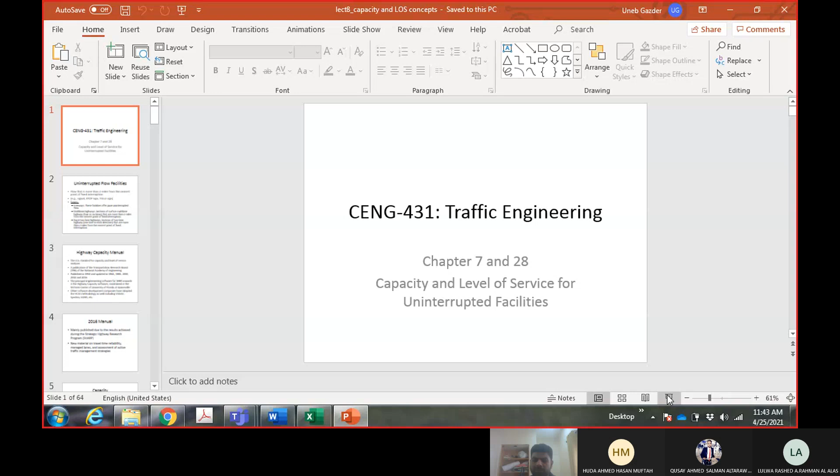So this is a very important and a very large topic of this course. Okay, and so this lecture covers this topic from two chapters of the book, chapter 7 and chapter 28. So some of the initial slides are from chapter 7, and then when we go to the analysis, it will be from chapter 28.

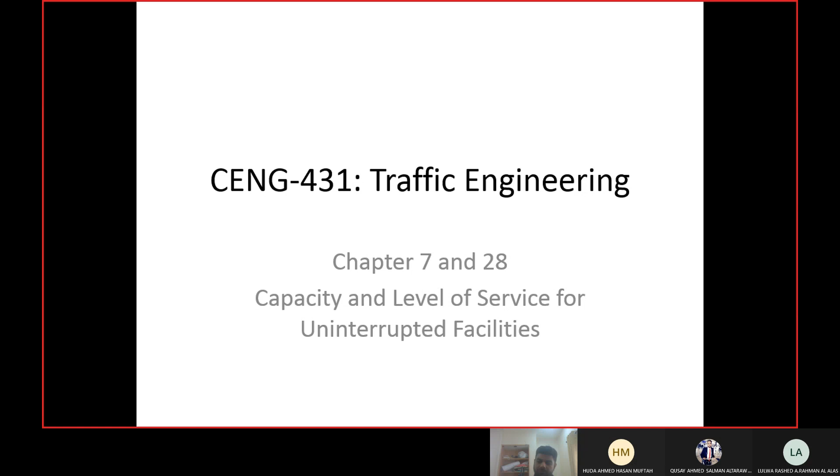The next lecture, the next slides will also be related to the same topic. Okay, it will be for a different type of highway, but it will be again related to capacity and level of service. So in this course, we will discuss the capacity and level of service for uninterrupted flow facilities. So we already know uninterrupted flow facilities are facilities which do not have any interruptions.

Now, can someone tell me what are the interruptions? What do you mean by interruptions? Huh? What do we mean by interruptions? Which interruptions make the facility interrupted or uninterrupted? Come on, go ahead. What are the interruptions? It's written there in the slide as well, in front of you. What do we mean by interruptions? No one?

Interruptions are intersections. So you can see the examples given here: signal, stop sign, yield signs. Okay. So if a facility does not have any interruption at all, we call it a freeway. So a freeway is a special type of uninterrupted flow facility which does not have any interruptions, does not have any intersections. Then there are some facilities which have interruptions, but these interruptions are very far from each other. Like they have given a value here, more than 2 miles from each other.

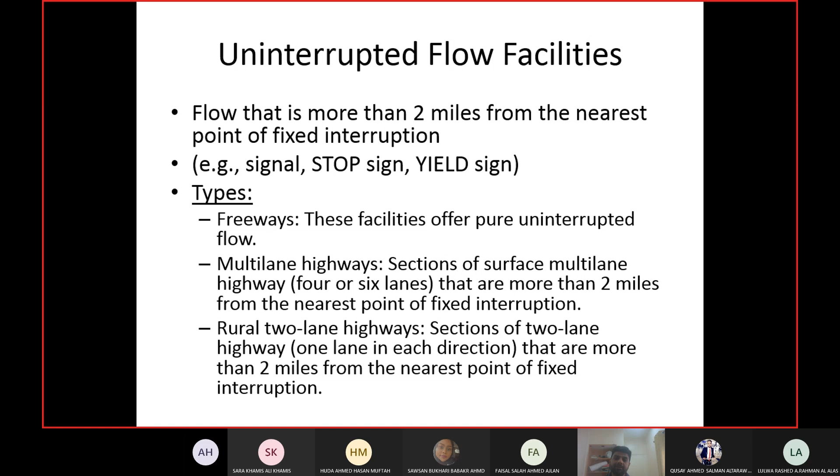So these highways which have interruptions more than 2 miles from each other can be multi-lane highways or two-lane highways. So as you can see the difference here, multi-lane highway means it has multiple lanes, and two-lane highway means it has only 2 lanes. Okay, so multi-lane highways can be 4 lanes, 6 lanes, and so on.

The procedure which we are going to follow in this topic is given by the Highway Capacity Manual. So what is the Highway Capacity Manual? It's a standard developed in the USA, and it is adopted in many parts of the world. Okay, so it's not exclusive for them. So it's a US standard by which you can calculate capacity and level of service of highways. The Highway Capacity Manual tells you the procedure and the methodology to calculate the capacity and level of service of the highways. Capacity, we know, right?

What is capacity? Yes, what do we mean by capacity? Anyone? What do we mean by capacity? If I say capacity of the highway is this much, what does it mean? Come on.

This section is always more responsive than section 1. I don't know. You are having the hangover of Sunday. Capacity, very easy question. Okay, if you don't know, don't know. What can I do? I cannot tell you again and again.

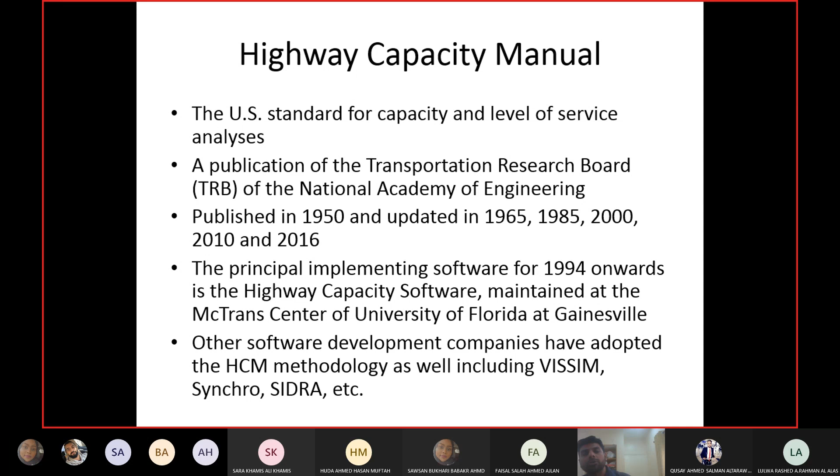Okay, if any one of you has attended the previous guest lecture which we had last week, Mr. Samim mentioned that for most of these softwares, the student versions are available. Okay, so you can download the student version. I will share the tutorials with you later on for Vissim, because you are required to use it for your project.

The 2016 manual was published as a result of a research program. That research program is known as the Strategic Highway Research Program, SHARP. Okay, in short, SHARP, Strategic Highway Research Program. So they started this program maybe 2010 or something, and they wanted to do some more research so they can update the 2010 manual.

So they did not have in mind that they would have to publish a new manual, but they did so much research that in the end they got excited and they said, no, we will publish a new manual altogether. Instead of just changing a few sections, we have so much data, let's publish a new manual. So they published a new manual. So in the 2016 manual, they have updated the analysis of the previous manual, and they have included some new things as well. For example, travel time reliability, that was not part of the old manual.

Managing of managed lanes. What are managed lanes? Managed lanes are lanes which are exclusive for specific road users. For example, high occupancy lanes, bus lanes, bicycle lanes, they are known as managed lanes. And assessment of active traffic management strategies.

So active means you are managing traffic on the basis of real-time data or on the basis of future data. So what is going to happen in the future, I will predict it, and I will make a strategy from now on. Okay, or you do it on a real-time basis. Okay, that is also active traffic management. So you have congestion on a particular highway, you do something so that demand for that highway will be reduced and congestion will be eradicated. So these are the new things which are included in the 2016 manual.

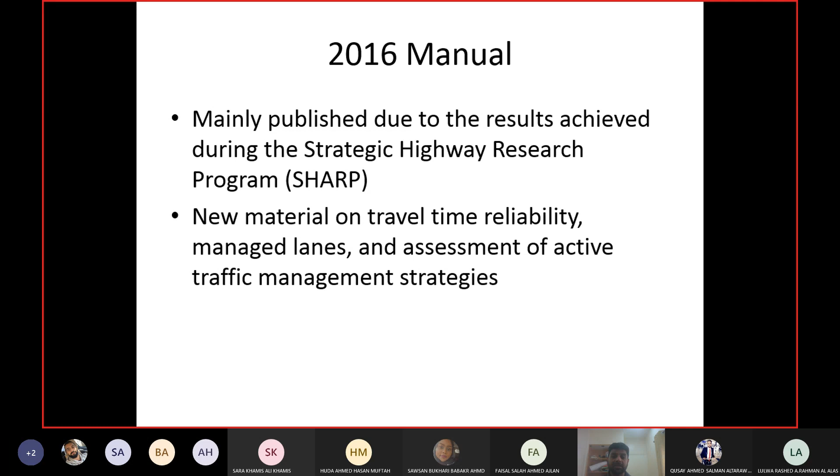Okay, according to the manual, capacity of a highway is defined as this. Okay, what I was asking earlier was basically this thing, which we already know: maximum flow rate for a facility. You already know that much, or you should know that much. Capacity is the maximum flow rate you can have on a facility. But in the manual, they have tried to elaborate it a bit more. So for example, now they are saying it can be maximum flow rate of vehicles or persons. In the previous chapters, we have only discussed the capacity in terms of number of vehicles, but it can be number of persons as well.

For example, the design for the metro in Bahrain has mentioned the capacity of metro service as 6,000 persons per hour per direction. 6,000 persons per hour per direction. What does it mean? We know what it means. Why is the capacity given in terms of number of persons? Because it's a public transportation system. Okay, for a public transportation system, you are not accommodating vehicles. You are accommodating persons. Similarly, if you are designing a pedestrian bridge, again the capacity will be in terms of persons per hour. Okay, same thing for the bicycle lanes as well.

And okay, then further to that elaboration, the maximum flow rate which can be reasonably expected. Normally we have used a fixed value as a capacity in the previous chapters. That value which we are using theoretically is not a fixed value. The capacity which you are expecting on the highway may not be reached. When you reach capacity, after capacity you have traffic jam, right?

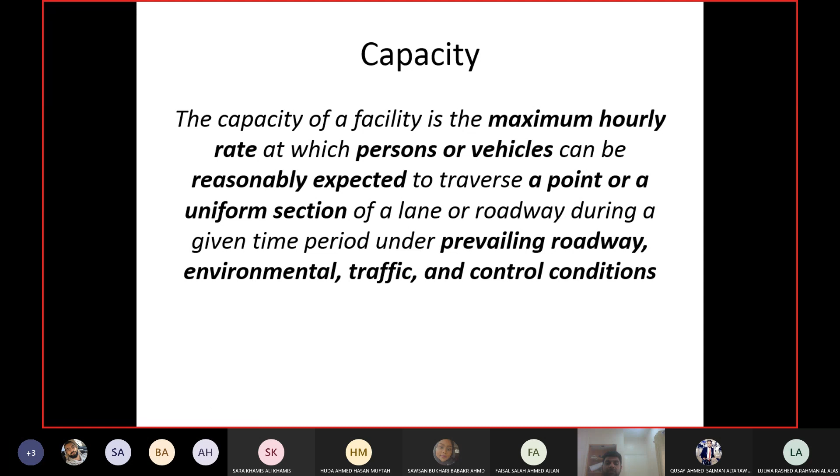Roadway conditions meaning the geometric design of the road, number of lanes, widths, shoulders, medians. Environmental conditions means weather conditions, roadside objects and other things. Traffic conditions include the type of vehicles, percentage of heavy vehicles, peak hour factor. Control conditions means the use of control devices, signals, roundabouts, stop signs, speed signs, markings. So all these things can increase or decrease the capacity of the road.

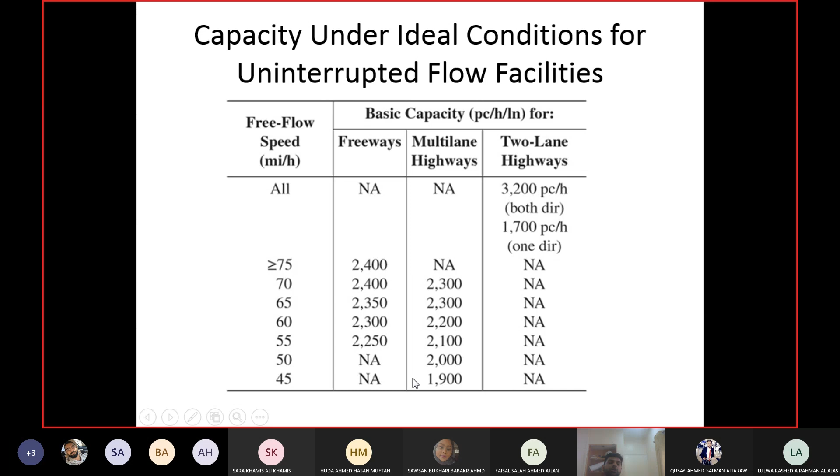For capacity of freeways and multilane highways, you need the free flow speed. Freeways can have a free flow speed of 75 or more, but multilane highways usually have lower design standards, so their free flow speeds are also lower. In any case, you can see the capacities for both of them. The capacity of freeways is always higher than multilane highways. And low speeds are not there for freeways and high speeds are not there for multilane highways.

Okay, now we come to the concept of LOS. LOS stands for level of service. Up till now we know 3 conditions of the road. We have used these conditions in the previous examples in lecture 3 and lecture 4 as well. So we know about capacity, we know about traffic jam, and we know free flow. Capacity and traffic jam do not need any explanation.

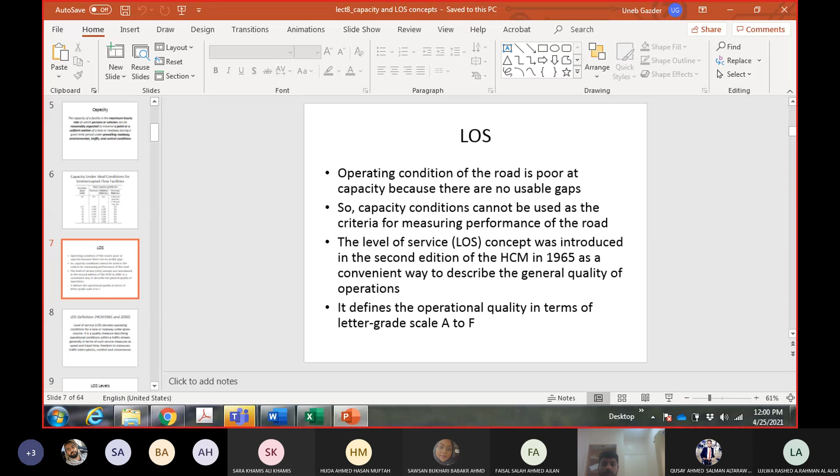What do we mean by free flow? Anyone? When density is low and the car can flow freely at high speed. Yeah, how low? It is almost what? 0. It's almost 0. So this is free flow. And these 3 are extreme conditions. You cannot use these 3 extreme conditions for design of the road or analysis.

Why? If you are designing for free flow condition, that means density is almost 0. Density almost 0 means no demand. If nobody wants to use the highway, why are you constructing it? Why are you designing it? So free flow conditions cannot be used. Traffic jam, obviously, you cannot design for. Nobody wants to have a traffic jam, right?

And then we have capacity. In capacity conditions, the flow is moving, but the operational conditions of the highway are still poor. The driver will still feel uncomfortable and inconvenient. Capacity means the highway is completely full. You are moving, you are not stopped, not in a queue, but your speed is very low and dependent upon other drivers, and there are no gaps around you. If you want to change your lane or make a turn, you have to depend upon other drivers to give you the space.

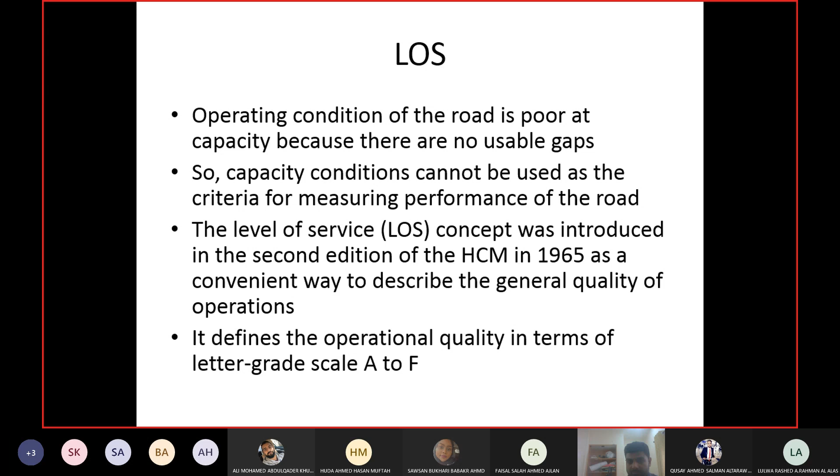Then this is the definition of level of service given in 1965 as well as in the 2000 manual. So they did not update it afterwards. Don't worry about why we are studying the old definition. Definitions, terms do not change. They remain the same, right? So that's why there is no update in that.

So level of service, as I said, denotes the operating condition of the lane or road under given volume. It's a quality measure. You define the flow of the highway as a qualitative measure, like A, B, C, D, E, F, within the traffic stream, meaning the volume, and it is impacted by service measures. Now, what are service measures? Service measures include, just give me a second.

Okay, what are service measures? Service measures are the factors which affect the level of service. So the operational condition of the highway is defined by level of service, and level of service is affected by the service measures. So what are the service measures? Speed and travel time. We know they are interrelated. Speed increases, travel time decreases.

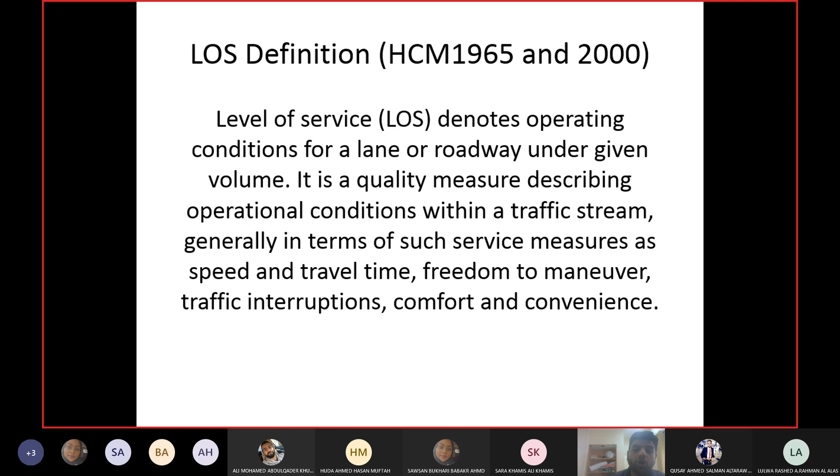And convenience is the ease with which you are driving. So comfort level is related to the mental condition of the driver, and convenience is related to how easily he is performing the driving actions, how easily he can maintain the speed, increase or decrease it, change direction or whatever. So all these things affect the level of service, and we call them service measures.

So we said levels of service are from A to F. You can see the description of five of them. Level of service E is capacity. So after E you will have F, right? So if level of service E is capacity, then F will be which condition? After capacity you have, sorry? Free flow? No, after capacity. What do you have after capacity? Traffic jam? Traffic jam, yeah. So F is traffic jam. You don't need to define it, we know it. F is traffic jam, E is capacity.

D is maximum sustainable flow. Now, as I said earlier, capacity is a very doubtful condition because there are no gaps on the road. So at capacity conditions, it is difficult to maintain sustainable flows. For example, the highway is operating at capacity, and one of the drivers wants to change his lane. This driver, while he's trying to change the lane, will cause the flow to stop. So although the highway is at capacity and the flow should move, because of one or two drivers, driver behavior, or any other factor, the flow may stop for a few seconds.

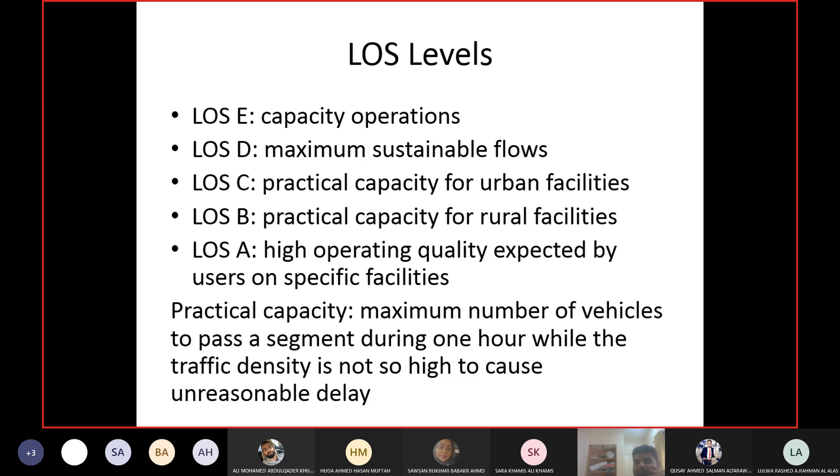And now the spacing has become so small that your flow, your movement, is directly impacted by the other drivers. So practical capacity is the maximum flow rate at which the spacing is sufficient for you to drive without much impact of the other drivers. After you go beyond practical capacity, the spacing has become less and your flow is now impacted by other drivers.

We learned about control delay in the chapter before last. There were questions on the blackboard and in the exam about control delay. Tell me, what is control delay? I'm still checking your answers. If you don't give me the answer, I will cancel the question on control delay and give 0 to everybody. Tell me.

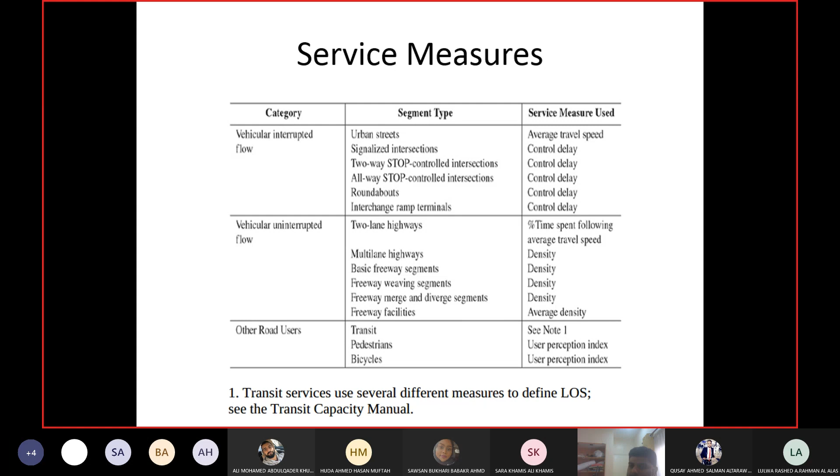Average travel speed, we know it: calculate the average travel speed of different cars. Time spent following, what do you mean by it? The time in which your flow, your movement, is affected by the driver in front of you. If he decelerates, you have to decelerate as well. If he is accelerating, then only you have the chance to accelerate, and so on. So percentage time spent following means what percentage of your travel time you are spending in this condition, where you are dependent upon the other driver.

So, to rephrase it to make it easier for you: the maximum flow rate you can have under given conditions to maintain a specific level of service. This is why it is also known as the capacity of the level of service. So we have the capacity of the road, and we can have the capacity of each level of service as well. Capacity meaning up to this value, the level of service is this much. After this value, this level of service will not remain.

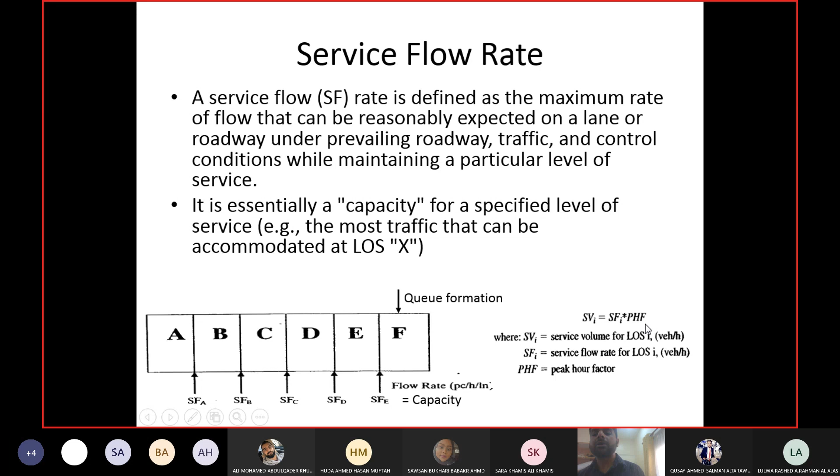Now in these slides we will only discuss basic freeways and multi-lane highways. Two-lane highways we will discuss in the next lecture. Basic freeways are, as I said, pure uninterrupted, no intersections. All the entries and exits for the highway are from ramps, and ramps are not considered as interruption because drivers to and from the ramp do not interrupt the flow on the highway.

Drivers to and from the ramp do not interrupt the flow on the highway. The interruption only comes when it is an intersection. So on freeways we only have ramps, no intersections. No driveway access as well, no access from the driveways or garages, no parking beside the road. Within the right of way of the road, no parking allowed. So we have full control of access. When you reach these conditions, using only ramps, no intersections, no access, no parking, this is what we call full control of access. Coming into the highway is fully controlled.

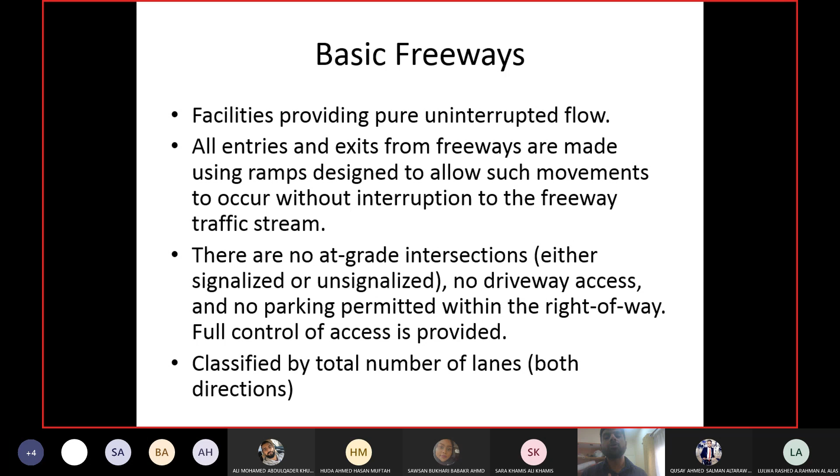Freeways are defined by the number of lanes in them for both directions. So if you have a freeway, you will tell me it is a 4-lane freeway or a 6-lane freeway or 8-lane freeway. You have to tell me the number of lanes. Then we have multi-lane highways. As I said, the interruptions are more than 2 miles from each other, and multi-lane highways are defined by their number of lanes as well as their median type.

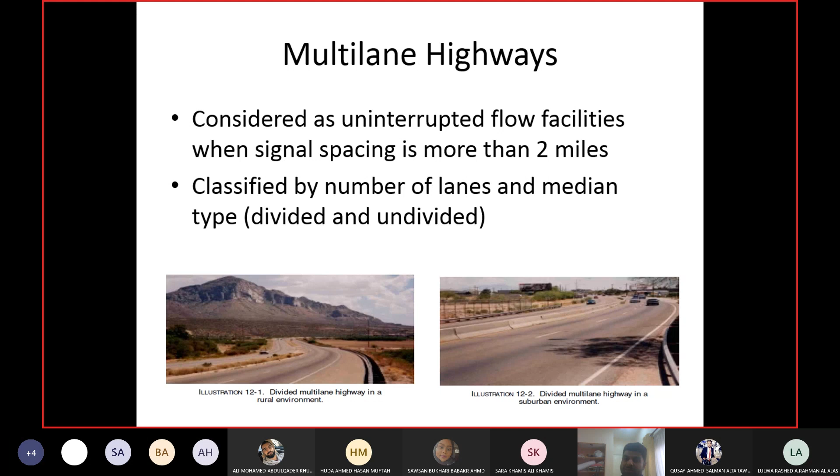This is the median. So if it is a 4-lane multi-lane highway with median, you will call it 4-lane divided multi-lane highway. If it is a 4-lane multi-lane highway without median, you will call it 4-lane undivided highway. So you have to tell me the number of lanes, and you have to also specify whether it is divided or undivided. This is how you do it. If you have any questions, you can ask me. Otherwise, I will open the attendance.

Just a word here. What I'm experiencing here. You should have spoken up. Yeah, this is true. Delay definition is true, and the major effectiveness for signals. I don't know what you mean here.

Anyways, you guys need to speak up. You guys are, I don't know, saving yourself in Ramadan. I'm speaking more than you. You can at least give me a 2-second answer, right? You owe me that much. I'm speaking 45 minutes continuously, and you cannot speak for 5 seconds. And this is not what we mean by fasting. Fasting doesn't mean that you don't do your job.